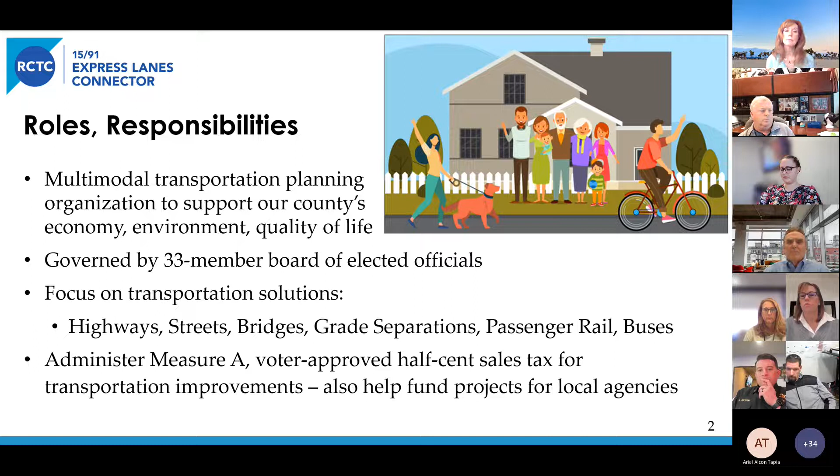We also administer Measure A. This was a twice voter approved half-cent sales tax that we collect on purchases in Riverside County, and we use those funds for major projects for public transit, and then also to help out with projects that local cities are using for their capital improvements. So next slide, Wayne.

So big picture overview for this project is that RCTC is working as a partner with our colleagues at Caltrans to build this express connector. I think most of you know or should know that we have the 91 express lanes that we opened back in March of 2017 in Riverside County. And then last year in April, we opened the 15 express lanes.

We have a missing link that is shown on the screen in kind of that gold orange color. So that's the express lanes connector that we're building to link the 2 systems from southbound 15 express lanes to the westbound 91, and then the opposite movement on the eastbound 91 express lanes to northbound 15.

We had originally planned to build that as part of our 91 project, the one that we opened back in March of 2017. But as we were working on the planning for that, we were coming out of the Great Recession and realized that we didn't have enough funding to build all of the pieces of that mega project. So we scaled back the project a bit, and this Express Lanes connector was one of the projects that was deferred until we could come up with some funding.

And thanks to Senate Bill 132, which was sponsored in part by Assembly Member Cervantes and then also Senator Richard Roth, we were able to cobble together enough funding to build this project. And then we started that in April of last year. So, go ahead and go on to the next slide, please.

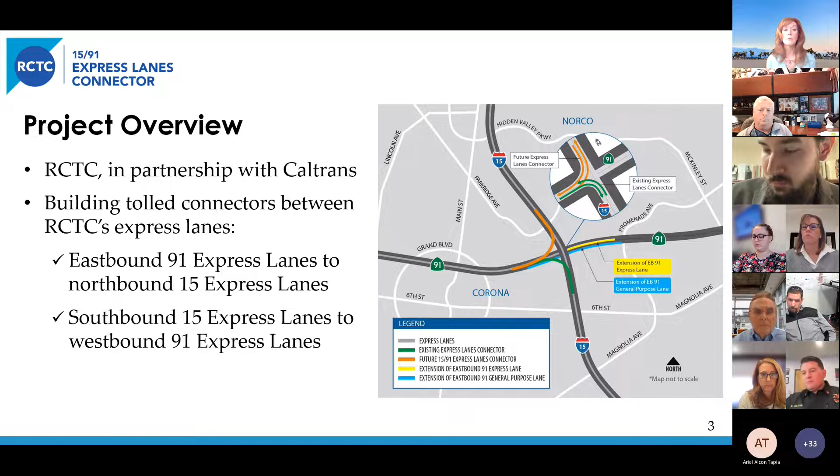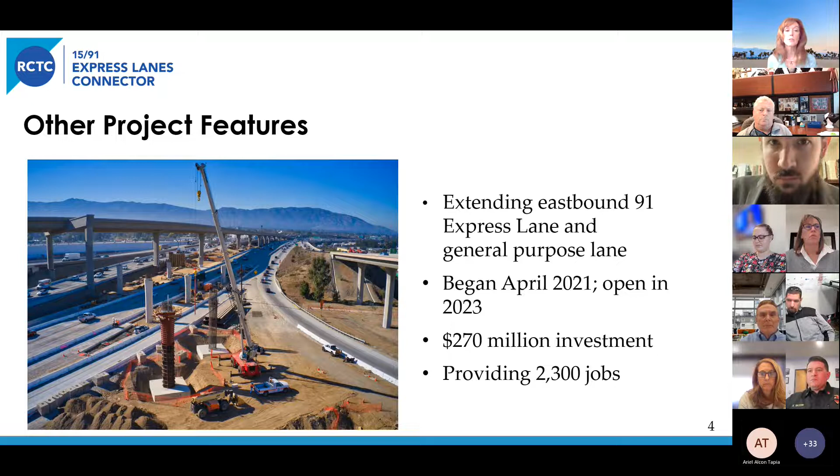So in addition to building that connector, we are extending our eastbound 91 express lanes a bit to the east, as well as a general purpose lane. I mentioned that we began construction last spring. We are going to open in 2023. We've invested $270 million toward this effort, and it's providing approximately 2,300 jobs in the construction, design, and management communities.

Some of the benefits of the project is reducing the traffic congestion, improving operations of the 2 tolling systems, enhancing safety because people don't have to weave in and out to get into the correct lanes. If they're in the express lanes now, they'll have to get out, get into the general purpose lanes, and then get back into the express lanes. So with this connector, there'll be a nice seamless transition. And there also will lead to better travel time reliability between the systems because of that time savings.

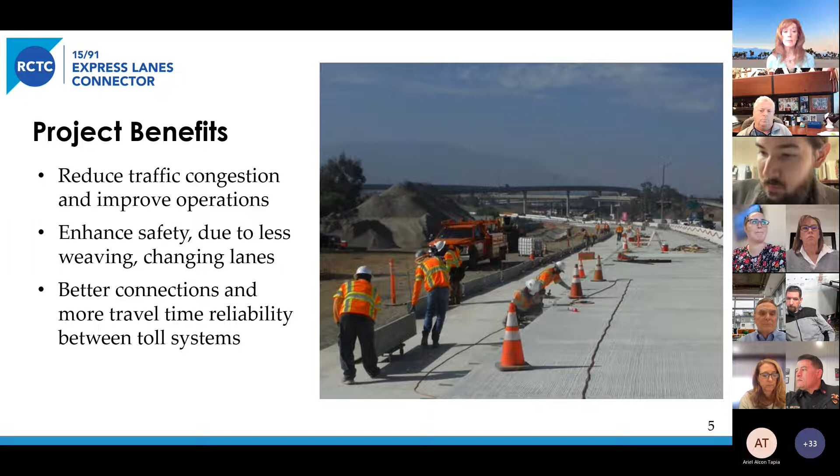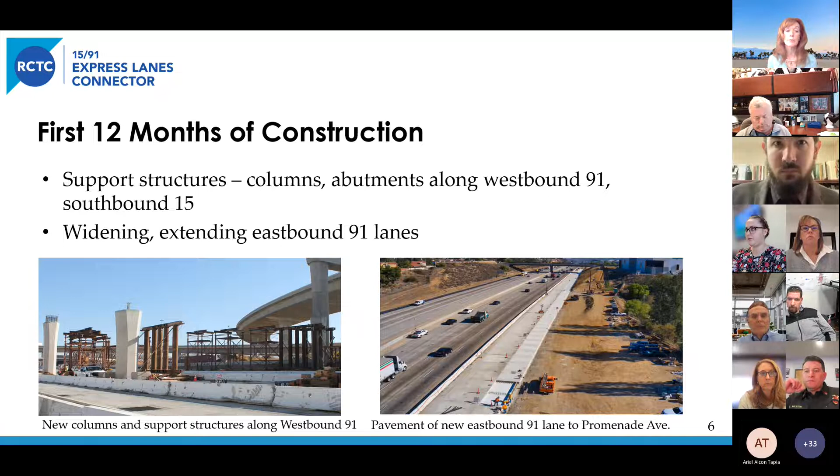So during our first 12 months of construction, we have been working on a lot of our support structures. We've been building columns, the bridge abutments along the 91 and the southbound 15, and we've been widening and extending the 91 lanes toward the east. There's a couple photos there showing some of the work that we've been doing.

And then the closure, which is the primary reason for gathering everyone today. We have 4 different closures that we will be planning in the next year. This coming closure is our very first one. And what we're doing is placing the false work, or the support systems, over westbound 91.

At the end of this year, we'll be removing that false work, so we will be requiring another full closure of the westbound lanes. And then heading in the southbound direction on 15, we expect to be having a full closure of the southbound 15 lanes to build the false work over those lanes.

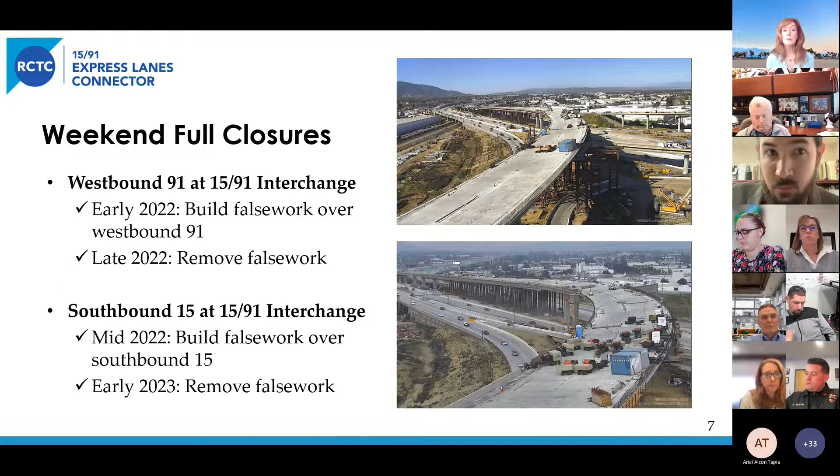And then at the end, in early 2023, about a year from now, we'll be taking down that false work. So we're putting false work up, taking it down on the 91 lanes, and then putting the false work up and taking it down on the southbound 15 lanes. So this will be our first closure, and stay tuned for specific dates on those other three. Obviously, we want this first closure to go well and to serve as a template for the other ones that are coming our way.

So the dates that we have, and I apologize, I cannot say with total certainty that these dates will be occurring. Like a whole lot of other things connected to COVID, we have been experiencing more than normal staffing shortages and just general issues with supply chain.

But as of now, we are anticipating that the closure will be Friday, January 21st. So that's a week from tomorrow, starting at 9 p.m., and then going until Monday, January 24th at 5 a.m. It's also depending upon weather.

The next slide will provide some detours. We do have support from our Freeway Service Patrol roadside assistance and the CHP. Signs are up, and if you aren't already doing so, please make sure that you register for our construction updates. You can do that either through email or text messaging. And if you have constituents, please encourage them to register for that important information. The info comes out at the end of each week for the following week's activities.

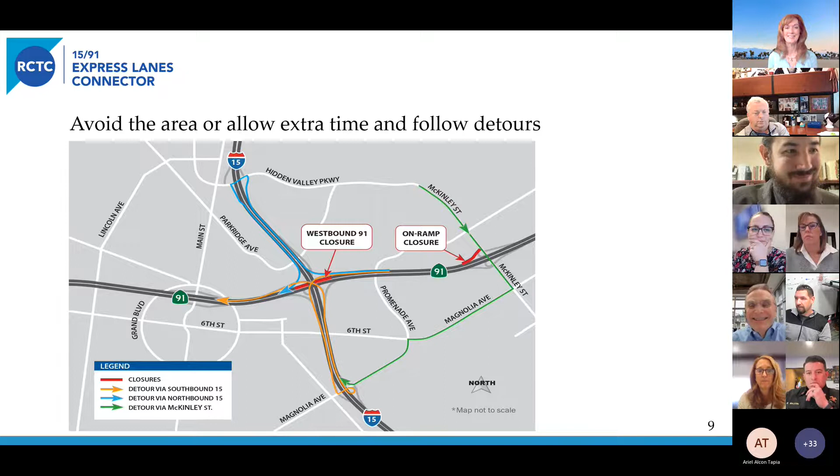So thank you, Josh. All right. Can you give me some of those cool little thumbs up things? Make sure you guys hear me. I don't see any yet. Oh, I'm getting, okay, there they are. All right. So I'm going to try to share my screen. I think I can do this here.

All right. Well, a little bit about myself. I'm the construction manager for MRJV. I apologize for my voice. I've lived in Corona for 20 years, pretty involved with the community. All my kids have either went to high school in the area or currently do go to high school, and I coach basketball at Norco High School. So I obviously understand the impacts that construction can have, as I've lived here through the past several projects. But to my voice, we played Centennial last night and we kind of got our butts kicked. So I'm having a rough go at it with voice this morning.

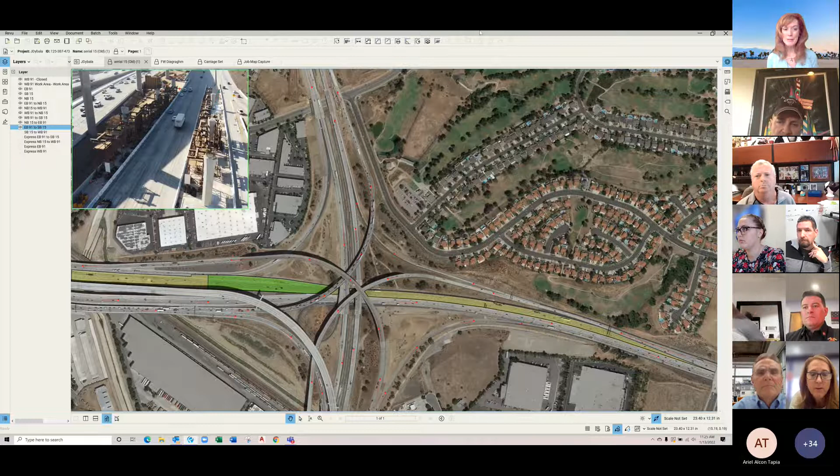Open. Hey Josh, can I pause you just a second? I don't know, it could just be me, but I'm not seeing your screen. I don't know if everybody else is seeing it. So is everyone seeing it? Okay, all right. Yeah, just me. So, all right, thank you.

All right, I will continue. Southbound 15, if someone's not seeing something, just interrupt. Southbound 15 to westbound 91, there should be flashing red arrows, that's open. And then the current express lane configuration should be open: eastbound 91, westbound 91, although it'd be tough to get into it through the closure. And then eastbound 91 to southbound 15 and northbound 15 to westbound 91. So in general, my point is there's still a lot open. Obviously this is a big closure, there's detours getting around, but the facilitation of the rest of the facilities for the freeway are open.

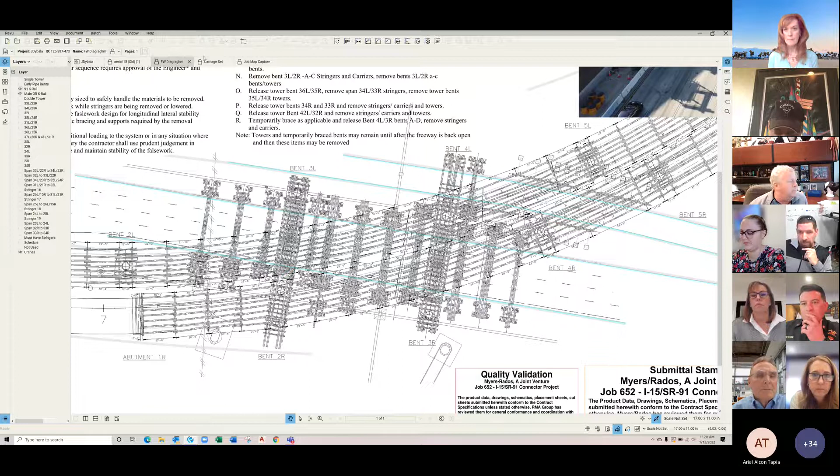I want to go into a little bit of the work we have. I'm going to go back and forth between two pictures. I'll go slow here, but there should be a plan sheet you see of what we call false work. This is the westbound 91. Can you guys see the plan sheet? If Cheryl could nod yes, hopefully that would help, or give me a thumb up, or a yes.

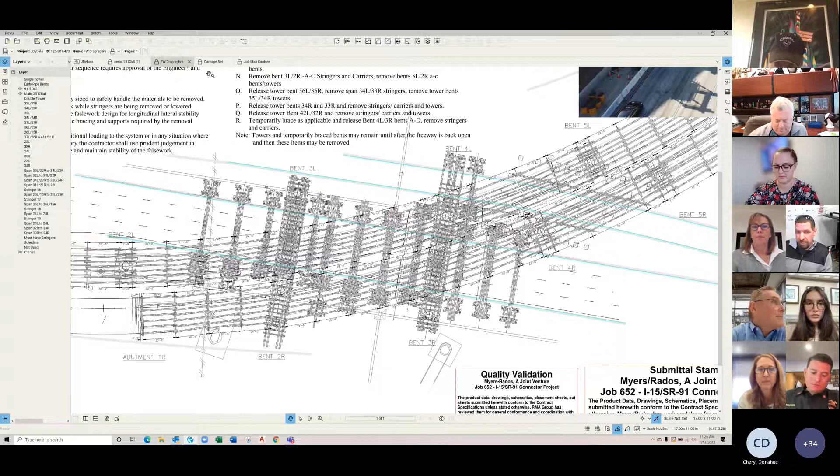You're good, Josh. Okay, so I'm going between two sheets here. There's a plan sheet here, and then there's a picture. This is obviously westbound 91, this is where the closure is happening. You should see a picture right now of our current false work towers, and we'll be setting beams across the false work towers, which I'll get into in a second.

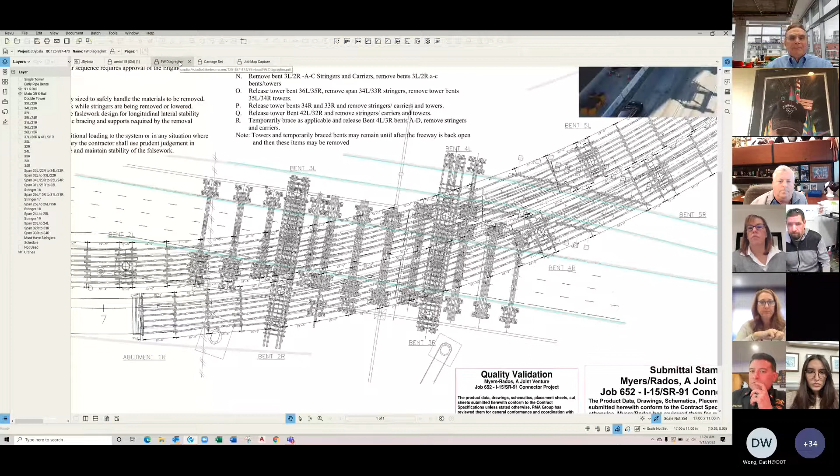Back to the picture, there's a sequence which happens. Right now we have those red towers all built and up. So the yellow highlights coming on the sheet, yellow and green, is what we currently have in place. Going back to the picture, those yellow and green highlights are those reddish steel towers on either side of the freeway.

All right, so now with the closure, we have to set beams across the freeway. The sequence, you'll see there's an orange set of beams that are going to get set. Hopefully you guys see the orange set of beams, see for effect. Then I'll go back to the picture, and that's basically what you got, a set of beams are going to be set across the freeway.

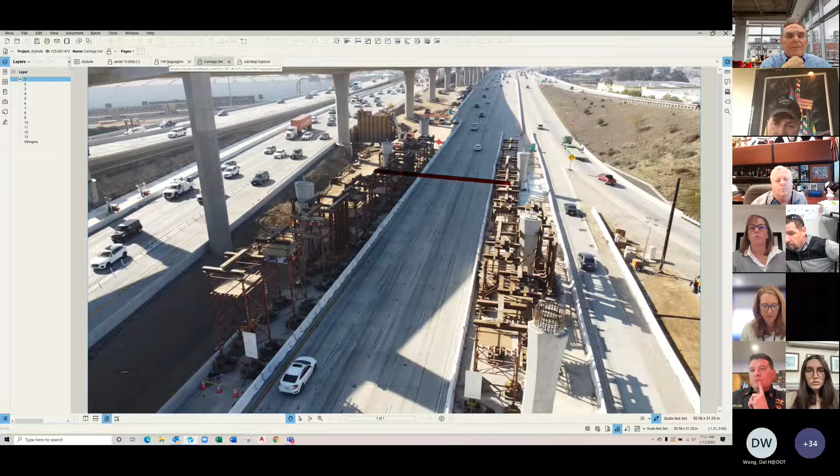Back to the plan sheet, so we're going to sequence, and hopefully these beams are popping up in orange on your guys' sheet. There'll be a sequence of all these beams getting set over the freeway. It's working, Josh. Good, so once all those beams are set, that's our first phase of the closure, getting those beams set.

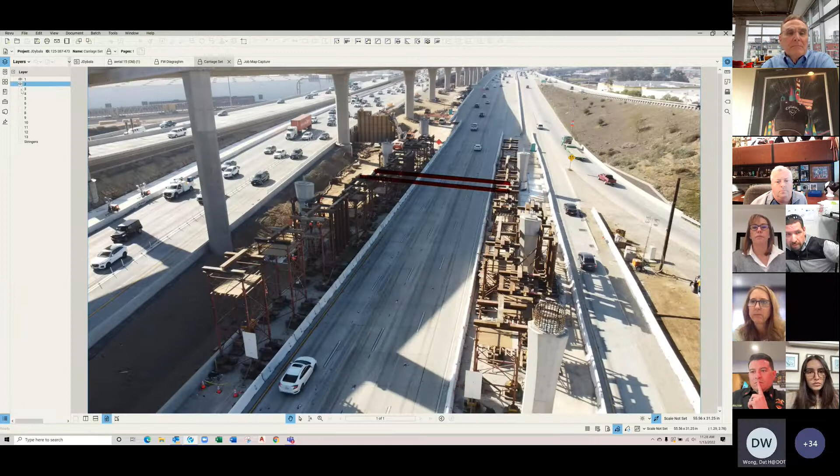So I'm going to go back to the picture. It's basically the same sequence, right? I'm just trying to show what you guys will see or what it'll look like. So all these little red beams, there'll be a lot more than what I have here, but they'll go across the freeway. But the way they show is very good, huh?

All right, so once we get all the beams set across the freeway, then the next part we got to get set is the stringers, which is what the bridge is going to be built on. Once we have that, you should start seeing red popping up. We have to go with cranes, there'll be cranes in the freeway, and they'll set all these red stringers all the way across. Hopefully you guys see in the plan sheet those red stringers going across the freeway.

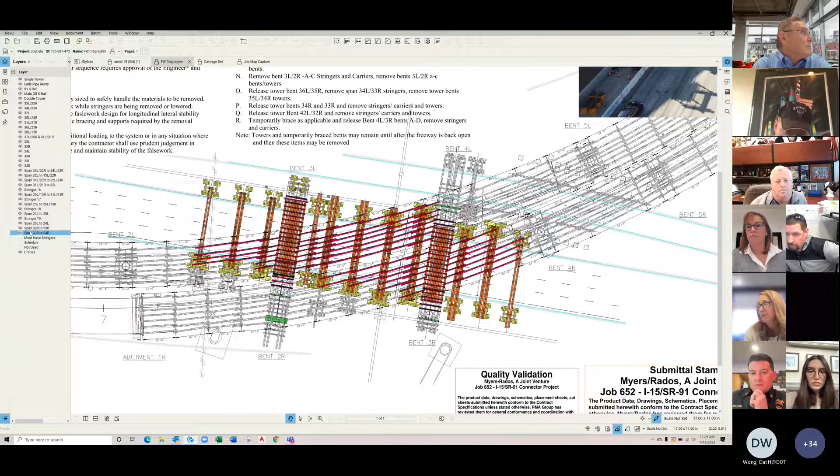You're good, Josh. All right, so obviously it's a little more complicated, that's why we need 55 hours to do the work. There's buildups and adjustments and everything that needs to be made to make sure everything's at the right grade, so we build the bridge in the right vertical area. But there's pretty much that set.

I gotta move out a second, I apologize. Oh, bear with me a second.

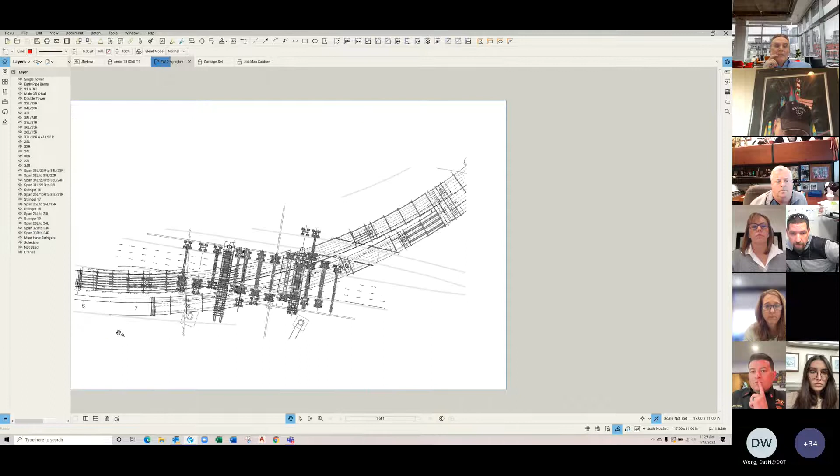But there'll be cranes set in different areas on the project, all right? So you'll see cranes. So while there isn't pedestrian or people access through, the road will be closed.

If there's emergency type stuff that needs to happen, I just want to point out, these beams get set one at a time. They get braced as we go, and then there'll be cranes, and cranes could get moved. So if there was a fire truck or a police car or something in some emergency that did need to get through, we could definitely facilitate that, make that happen, whether it's through the freeway or through the Main Street auxiliary area. All right, hold on a second.

So these cranes will move in different locations depending on what they're doing, right? They may be off to the side, they may be in the middle of the bridge, middle of the road. They'll be all over the place, right? Moving whatever radiuses they need to set the beams.

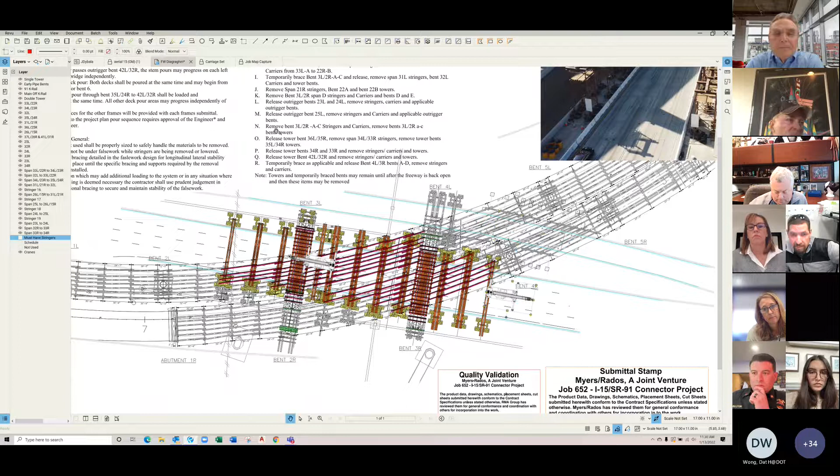Back to the carriage set. So again, westbound freeway, everything will be over the freeway. I didn't have time to draw in all the stringers, but back to the plan sheet, those red beams that are going across, you'll kind of have a situation like this. These orange beams will all be set across on top of these red beams. It'll make up the false work.

Then in the background, you can kind of see that's what we call an abutment. That's the start of the bridge. And then the end of the bridge is actually in the middle of the 15. So once we are ready to get over the 15, we'll have a similar closure, just like this, doing almost this exact same process, but over the 15. So that'll be the second time we have to do this.

And there'll be a third and a fourth, and it's basically to get all this material down, right? So once to put it up on the 91, once to put it up on the 15, once to take it down on the 91, once to take it down on the 15. And hopefully by that point, the bridge is complete.

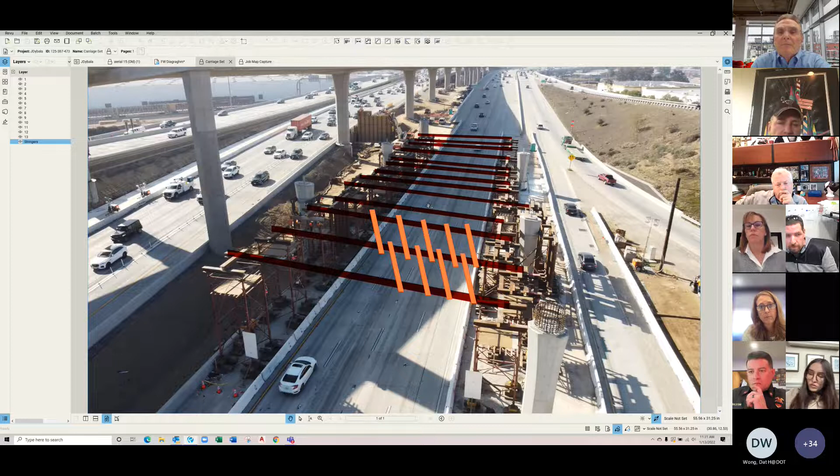I think that's all I have. I can answer or help answer any questions if anyone has anything. Or if I didn't address something, Wayne, Cheryl, let me know, or you guys can take it over.

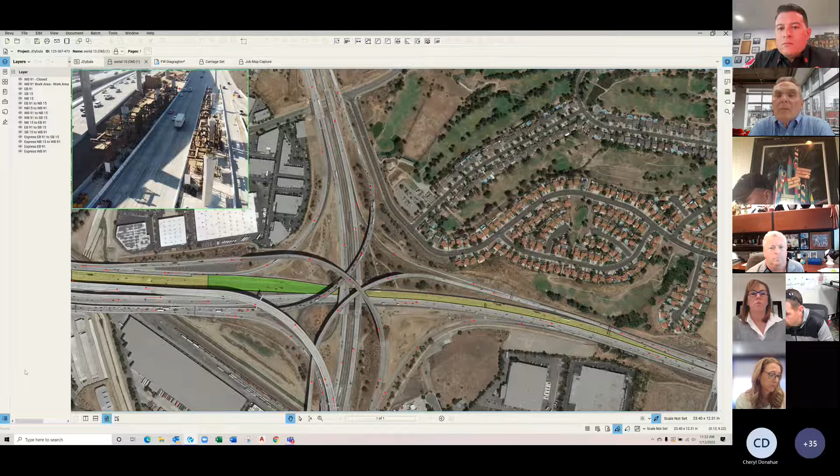So regardless, whether it's our crews or an emergency, you kind of have to get through the closure to get to the work area, if that makes sense. It's not like you can take a side street and come through a dirt area because we're in the middle of the freeway. So I think the best route, if we had an emergency and had to get to the job, would be from the Hidden Valley area, from the 15 south, and then either take the South 15 to West Connector and come through this, hopefully you guys can still see my screen, get through this big connector area here to the project.

So that would be my recommended course if for some reason someone random had to get to the project in an emergency situation. Okay, perfect.

I'll include that with response information for the department. And then I would just ask from your end, thinking for the safety of your personnel, in the event somebody did get hurt, when you call 911 and you're giving the information to dispatch, just give them the approach, the best access information. And if you have a flagger that can get us in there, that'd be helpful. That's all I got for you.

No, good comments, thank you. Josh, you might remind him that there's an opening in the K-rail safety area there coming off that connector that they can get in pretty easily.

Yeah, we'll have multiple, and we should have enough people to the point of flagging, or when we know something needs to be in there, of getting someone in and around, right? That'll be something we discuss in our hazard analysis meetings and safety meetings prior to the operation.

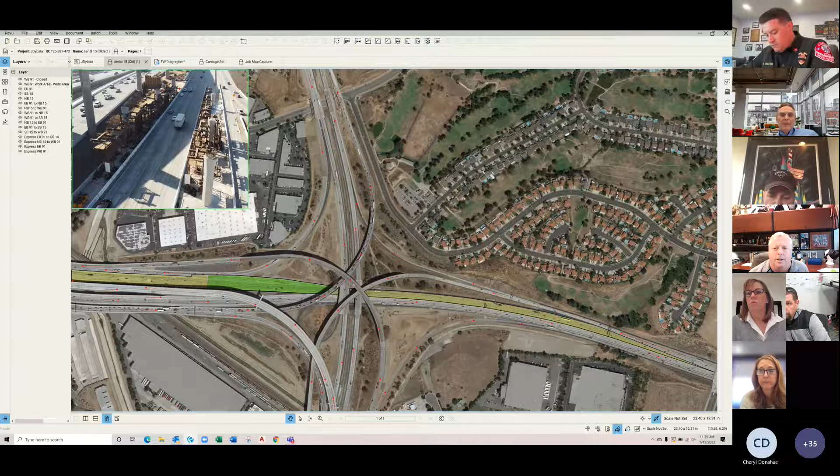Thank you, any other questions? Just wanted to thank you for the briefing. I admit I had this closure completely confused with the Green River closure from last weekend on the 91, and I didn't realize there was a second one. So thank you very much.

Understandable, Jeff. We knew that we had two separate westbound 91 closures occurring in a short amount of time, so we were trying to separate the communications and not get too far ahead of this one until we got through the one last Friday night over by Green River. So thank you for attending and getting up to speed on this.

Just for the public information folks on the line, we will be rolling out a lot of information over the next 5-6 days, including on social media. Any help that you can provide in sharing that information so it goes to your followers would be really appreciated. Shelley from our team is getting ready to start pushing those out, so very soon.